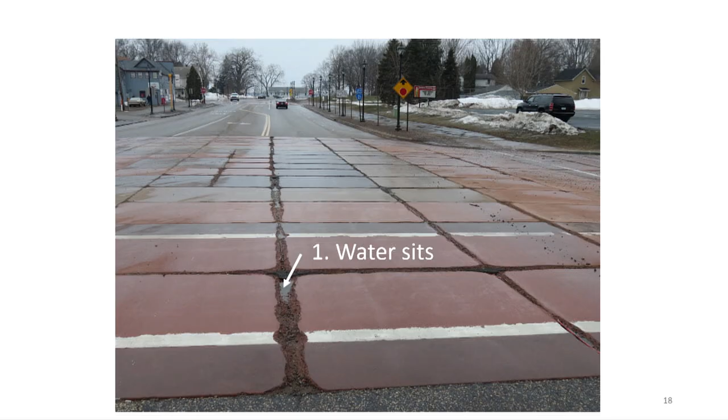So why is this research important? What is this all about? What's going on here? Well, if I have concrete, and if that concrete gets wet, if water sits there and the concrete becomes saturated, really wet, and then it subsequently freezes, it can become damaged. It's damaged by the freezing event itself. That's not good. Well, water, when it goes from a liquid to a solid, there's a 9% volume change.

So I did an experiment for you. Last night, actually yesterday evening, in my fridge, I took a can of Coca-Cola and put that in a freezer. It was sealed, just to see what would happen. Don't tell my wife because I haven't cleaned it up yet. This is what happens: 9% volume change causes an explosion, goes all over, makes a great picture. It's going to be a great YouTube video - but not necessarily making your wife happy.

And it's not necessarily good for your concrete either. Because if this happens in your concrete, it can become damaged, it can cause things to have a problem. If that makes sense, give me a yes on 3. 1, 2, 3. Oh good, you're awake.

So how in the world do you design for freeze-thaw events? How does this work? Well, first the question you ask is, will the concrete freeze? If the answer is yes, then you put something called an air entraining admixture in the concrete - this is like a soap that stabilizes bubbles inside the concrete. You have to get enough air, 6% plus or minus 1% air volume. And if the answer is no, you add no extra air at all.

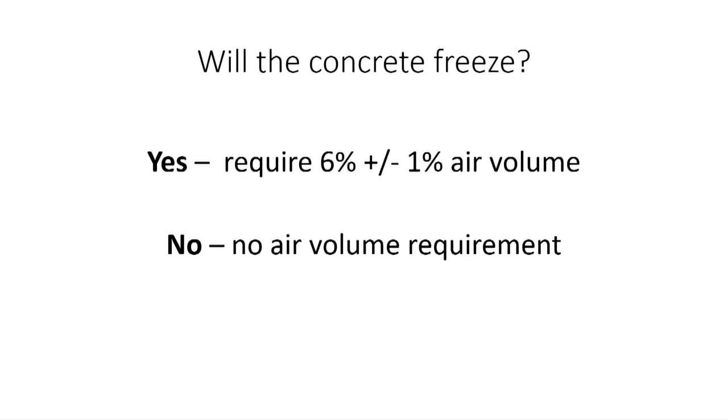You might ask, does this make sense to you? Some of you might say yes, and I would say this is nonsensical - the stupidest thing I've ever seen. Well, weather is not the same everywhere. Does everyone agree with that? Freezing is a little bit different in different places. Moisture content's a little bit different in different places. Don't you think that could have an impact on this phenomenon? I think it could.

If you're still not with me - how would you design a road for traffic? If I did the same thing I did for air entraining concrete, the first question I'd ask is, will there be cars? If the answer was yes, I build I-35. If the answer is no, I build a hike and bike trail. Does everyone see how this is illogical? Give me a yes on 3. 1, 2, 3. Oh, they're not - the left-hand side gets it, the right-hand side is not so sure. There must not be traffic engineers over there. Does everyone see that it's kind of silly to design a one-thing-fits-all category?

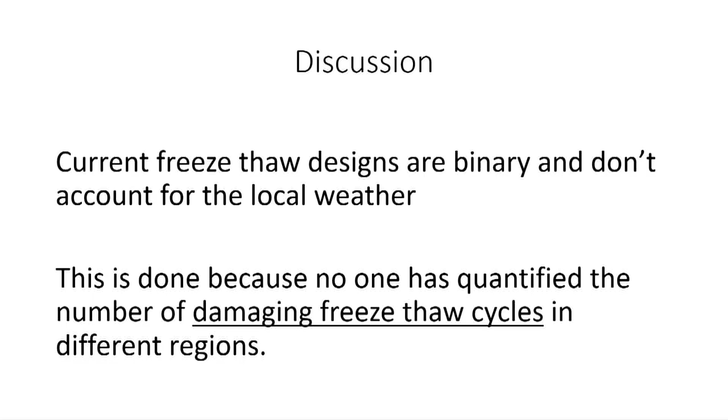This binary decision - freezes, yes, add air, same amount no matter what, doesn't matter where it is - it's illogical, doesn't make any sense. But we do this because we don't know how many damaging freeze-thaw cycles there are. No one's ever quantified it, no one's ever done it.

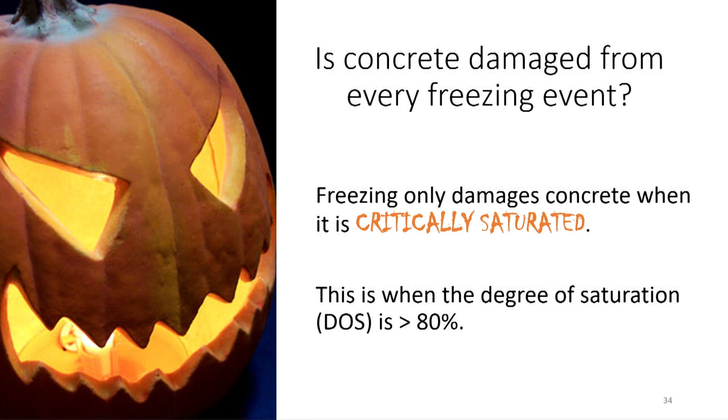So you're like, damaging freeze-thaw cycles, what's that? Well, Halloween's coming - kind of a scary time, right? And what matters is that freezing only damages concrete when it's critically saturated. That means when the degree of saturation is above 80% inside the concrete. Degree of saturation is the percentage of water that fills the pores. So if I'm at 100%, I'm totally saturated. If I'm at 0, I have no water inside it. High DOS means wet concrete, low DOS means dry concrete. You with me? Oh good, you gave me a yes.

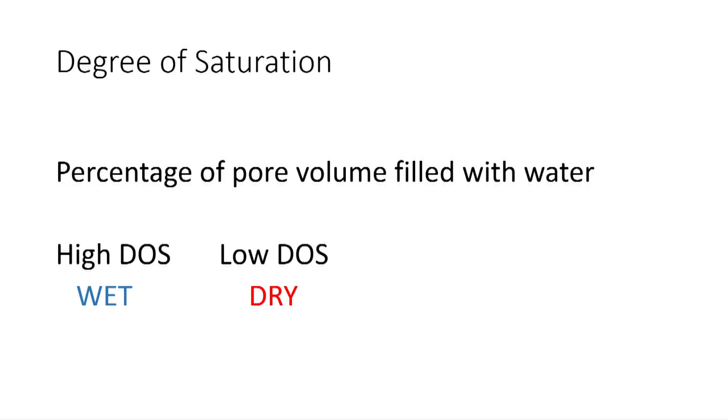I didn't even ask for it. I appreciate that. So what does this mean?

This means if my degree of saturation, if my moisture content of my concrete is below 80%, the concrete will still freeze, but it doesn't cause any damage. Think about the Coca-Cola I showed you before. If the Coca-Cola can is only half full when it freezes, that's not going to explode all over your fridge. But when it gets very, very close to the top, that 9% volume change causes all the damage. Same thing happens in our concrete.

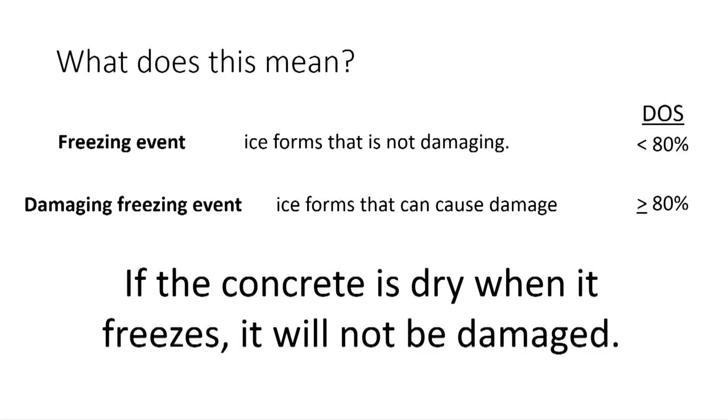Exact same thing. We just have to understand where these places are and when a freezing event happens. You're like, man, that sounds impossible. Yeah, it's hard. It's actually one of the hardest projects I've ever done in my entire life. But I'll tell you how we did it. In summary, if the concrete's dry when it freezes, it's not going to be damaged. But if it's wet, that's when it does.

So how many of these happen every year? Or this year compared to next year, compared to last year? Sounds impossible. We need to know inside of the concrete what the moisture content is, the degree of saturation. We need to know the temperature in the concrete. And we need to know and see ice forming inside the concrete. Oh my gosh, what's going on? How would we ever do this?

It stays there. Why? Because it's the worst case scenario. You know those places exist on your roads. You know those places exist on your bridge. Those places that don't drain, that's your enemy. And that's what I'm trying to simulate with these tests. So we've got these hooked up to weather boxes where we can measure how these things change over time. And there's actually one here. Baha, the great Baha, wave your hand, is over there showing one of these weather boxes if you want to come see it next door.

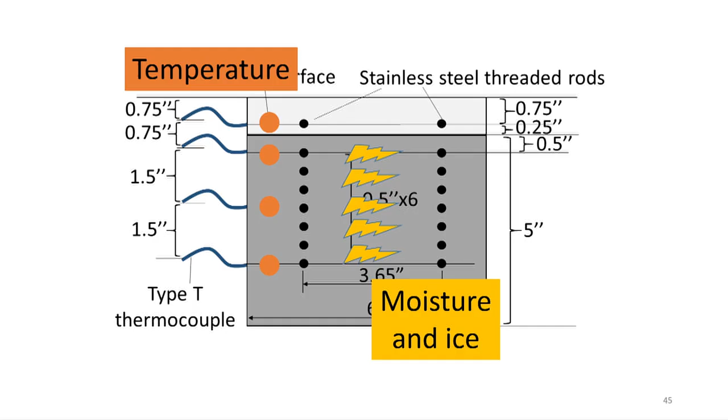Now, between those stainless steel rods, we actually send electrical signals, and we can measure the moisture content of the concrete, and we can see ice forming. You're like, what? How is that possible? Well, when concrete is wet, it's easy to send an electrical signal from one to the other. When concrete is dry, it's hard to send an electrical signal from one to the other. And when ice forms, it's wet, so you're sending signal, and all of a sudden the solid ice particles make it really hard to send signal. So when it gets really easy, then really hard to send signal, ice just formed. And you also have temperature, so you can see ice forming. It's pretty crazy, it's pretty awesome.

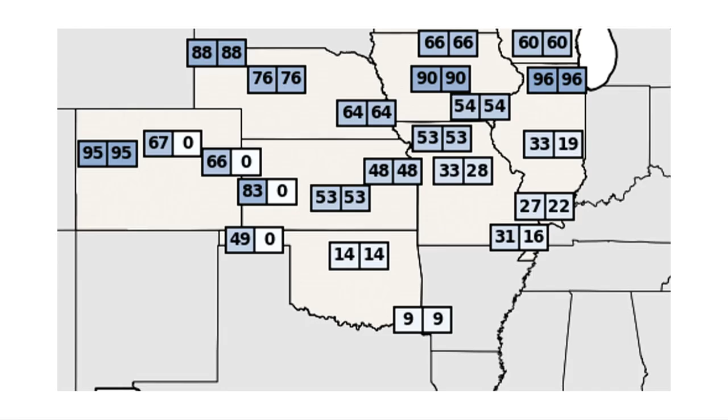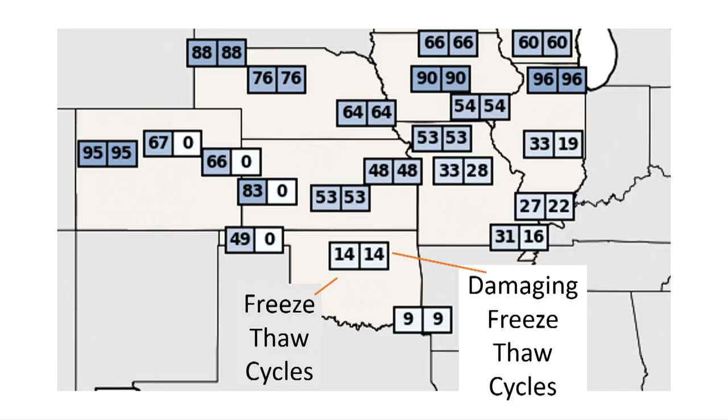So first number, freeze-thaw cycles. That's how many freeze-thaw cycles that we measured in Stillwater, Oklahoma in that year. Second number is how many damaging freeze-thaw cycles we measured. Remember damaging ones? That's when it's got to be wet, it's got to explode like the Coca-Cola inside your fridge. But now let's look next to it. What in the world is happening here? What was the first number?

Number of freeze-thaw cycles, what's the second number? Has anyone ever been to Western Oklahoma? We got some Western Oklahoma people. If you go out there and walk around, it looks just like this.

Tumbleweeds, I've seen more tumbleweeds than ever in Western Oklahoma. It's dry, ladies and gentlemen, it's the high desert. And in the high desert, it's so dry that it freezes, but it's not wet enough to cause damage from freeze-thaw cycles.

And this didn't just happen in Oklahoma. These are 4 separate independent measurements. Does everyone see that? All saying we're getting tons and tons of freeze-thaw cycles, but no ice forming to cause damage. That's crazy. So what's going on over here?

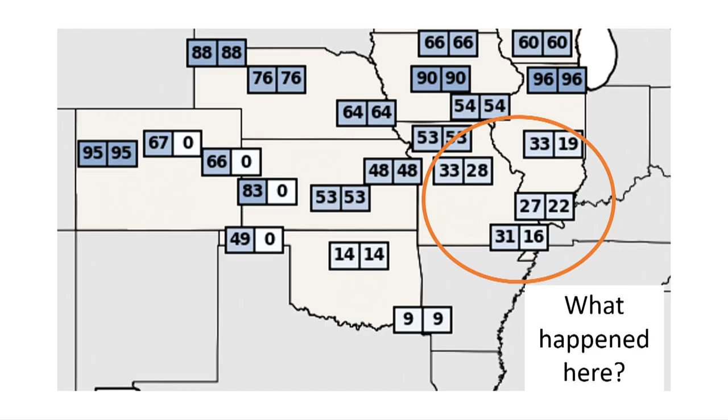Look, what's the first number? Freeze-thaw cycles. Second number, damaging. See how it's a little bit lower? This means these are what I call kind of wet. That's an official term now. Kind of wet, not super saturated, just wet enough sometimes to cause some problems.

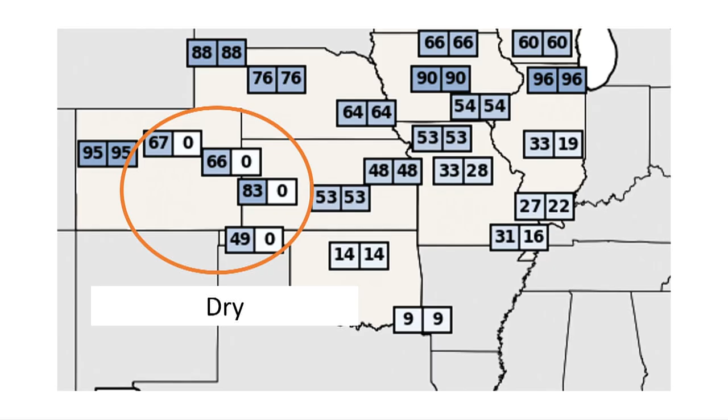So in summary, we have dry, we have wet, and then we have my favorite, kind of wet environments. These all have the same latitude, but because of different longitudes, they have different moisture contents. Does that make sense? So they have different amounts of damaging happening.

This is really mind-blowing stuff that's going on here. When we saw this, we thought, oh my God, this is happening, this is crazy. Then we asked another question.

What weather causes these different DOSs? This is cool to measure it, but what weather is responsible for making these different DOSs happen?

We went into the soil literature, tons of soil literature about moisture contents and models to predict, because farmers really care about the moisture content inside their soils. These are the 6 things that came up again and again in the soil literature for being really important to predict moisture content. So we're going to use those exact same things, and we wanted to use those to predict DOS, all of these things.

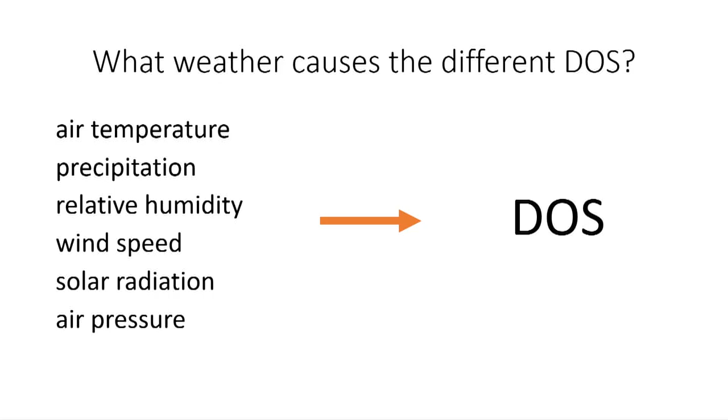So let me get this straight. I got tons and tons of weather data from many years, and I'm going to use all of this crazy data to predict one thing: what the moisture content is. What tool should I use to do that? Oh, baby, AI. This is perfect for AI. This is what AI is made to do.

So that's what we did. We used machine learning models to do this, we used genetic algorithms to do this. We used our average monthly weather data to predict our average monthly DOS. Basically, if I know the weather, I'm probably going to be able to predict how wet the concrete's going to be. Does that make sense? And the weather did that.

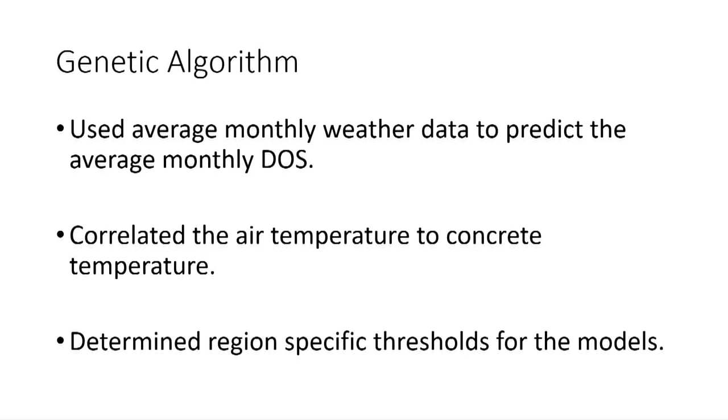We correlated the air temperature to concrete temperature. We determined region-specific thresholds for our different models. What does that mean? That means the weather's different in different parts of the United States, probably not too surprising to you. But there's a little bit different tweak to the model you have to make for each one of these different regions. Different amounts made bigger differences.

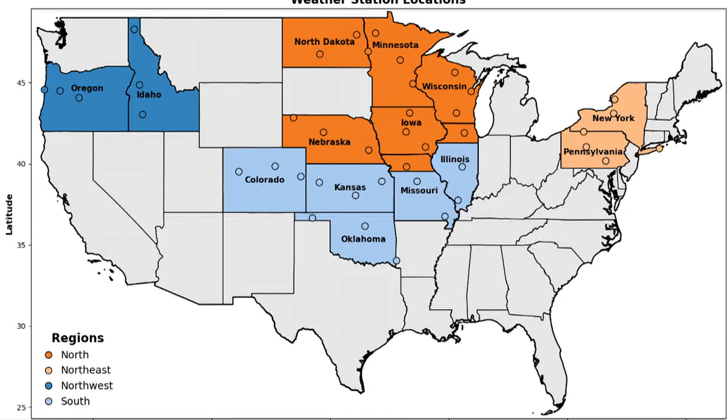So this genetic algorithm, we trained the algorithm for 1 year of data, then we compared it to 3 years of measurements. We had 4 total: 1 year of training, 3 years of actual stuff that we compared it to. We accurately predicted our DOS more than 90% of the time. That's insane. I think that's insane. We could accurately predict our freeze-thaw cycles with more than 95% accuracy.

That's craziness, isn't it good? She thinks it's good, do you think it's good? I think it's good, right? So what does this mean? This means that you can accurately predict the number of damaging freeze-thaw cycles by only using weather.

That means I don't need the blocks anymore. The blocks were cool, they're amazing. But I only need the weather to be able to predict all this performance. That's super powerful. So, okay, you say this is powerful. How can we use this? What can we do with this?

Well, we took 574 weather locations, over 24 years worth of data for each one.

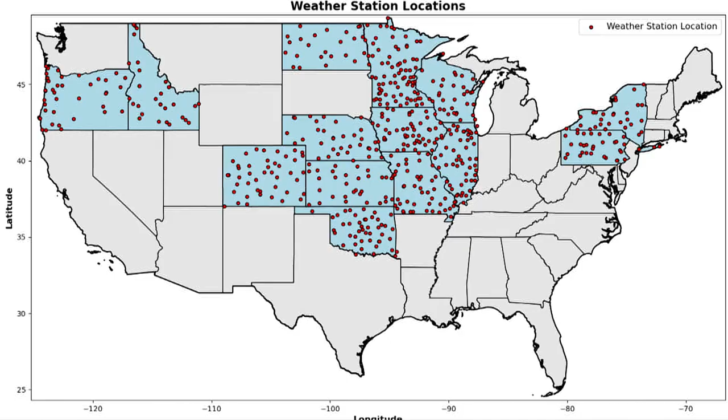We combined the data and made interpolation algorithms to look at values between stations to get the best values. We made maps that look like this. Usually you see this for 'what's the temperature going to be today,' but we can tell you how many damaging freeze-thaw cycles there's going to be on average based on 4 years worth of data. This is powerful.

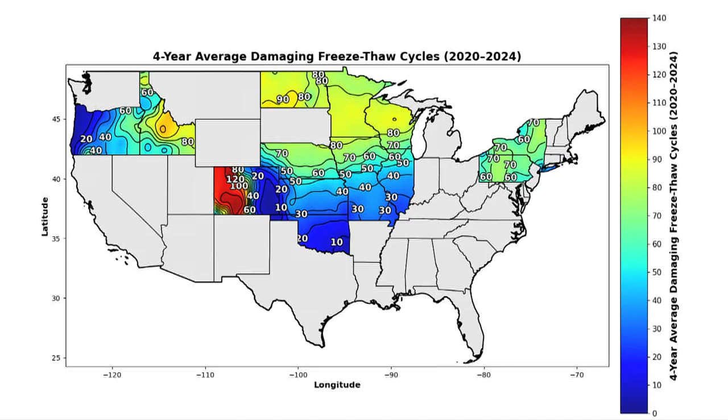You can look in different regions and start to make decisions about where you want to entrain air and where you don't want to entrain air. This is like getting the key information we've been needing from our understanding of what's been going on.

Put in the latitude and longitude, hit a button. It tells you how many damaging freeze-thaw cycles, how many normal freeze-thaw cycles, and what the variability is. It helps you design, helps you think about these things.

So what's next? The next step is to give guidance, to actually tell people: this is how much air you need in this location, this is how much air you need in this location. We're working on that now.

We want to extend this to the missing states. I don't really feel comfortable giving advice about freeze-thaw cycles in a state if I haven't taken measurements there. Does that make sense? You really need to measure in places like Arkansas so you can give them guidance. And maybe we could extend this to other types of concrete, different water-to-cement ratios, vertical concrete, and other things as well.

This is a start, not an end, but it's something we've never had before. It's been my dream for more than a decade to get work on something like this. And this was the hardest project I think I've ever worked on in my entire life, to bring all this stuff together.

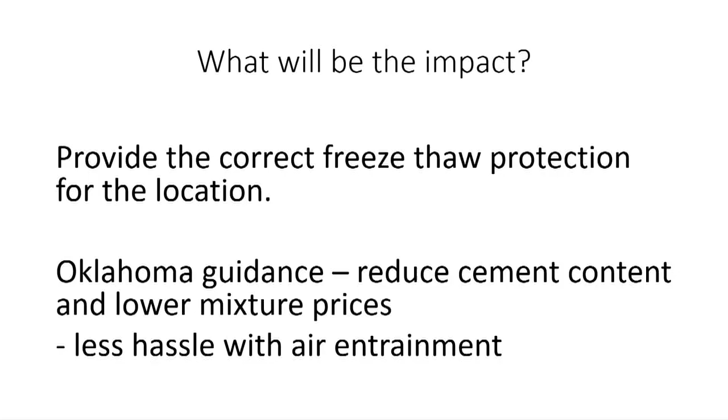It's crazy. So in conclusion, field measurements have been made to determine the amount of damaging freeze-thaw cycles. We did it in 42 different locations over 4 years. A genetic algorithm has been used to predict freeze-thaw performance based on weather data to tie them together. We have maps and online tools that make it easy to show the average and variation of damaging freeze-thaw cycles, and we're moving ahead with that.

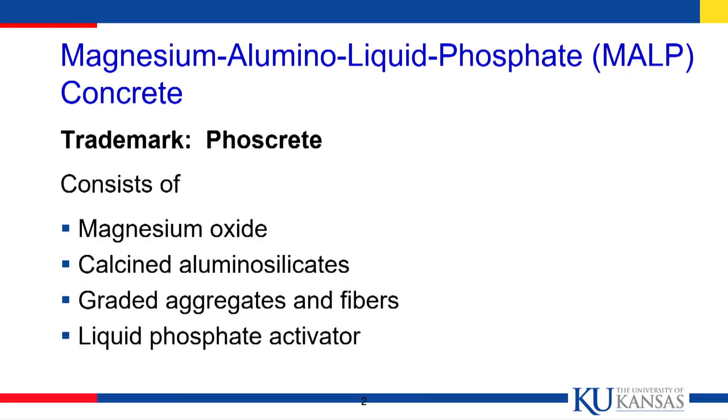So it's really statewide. We've only used it on about 12 or 13 different bridges that I'm aware of. What I'm looking to do is, we built a lot of bridges in the 60s and 70s, and I'm looking for a way to stop corrosion, to get a deterioration rate that's 0, which is a rather aggressive goal, but that's kind of what I'm aimed at. So this consists of magnesium oxide, calcined aluminosilicates, graded aggregate and fibers, and a liquid phosphate activator.

Okay, Dr. Darwin started his testing about 3 years ago, almost exactly, and he's been looking at this material for some time now. He's done some really good testing, and we've learned an awful lot.

We're looking at freeze-thaw damage, like Dr. Ley just talked about a great deal. We don't want materials that are going to have a lot of problem with that. And salt scaling, he's looked into that pretty hard. He's also looked at the MALP material with an additive, and the additive we're dealing with is from a soybean product. It's kind of a pore blocker, and it's called Endure.

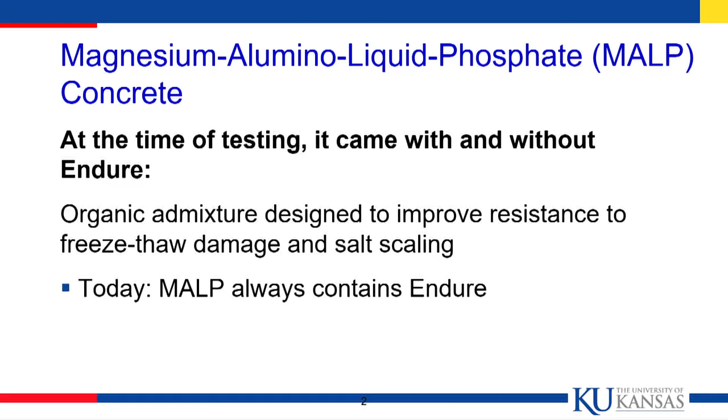So he's doing the testing with and without Endure, and he's going to look at more than one magnesium cement. But what are the benefits of this MALP material? It provides for rapid repair, gains high strength in an hour, and minimizes the time of a bridge closure. That MALP material can be applied in very, very cold weather. It has this liquid activator, which is unique.

Drawbacks: it generates a lot of heat, and it sets up rapidly. Well, that's an understatement - it sets up too quickly. We've had some locations where it's frozen on us before we could actually get the material on there.

So there are some alternatives. We're looking at another kind of magnesium cement - we'll just call it MKP for short, magnesium potassium phosphate. This is water activated, so we've got to avoid the cooler weather. It doesn't have the corrosion properties that the MALP material has, but it is easier to work with. There's less heat that you're dealing with, so it's easier to finish, which is a good thing in many respects.

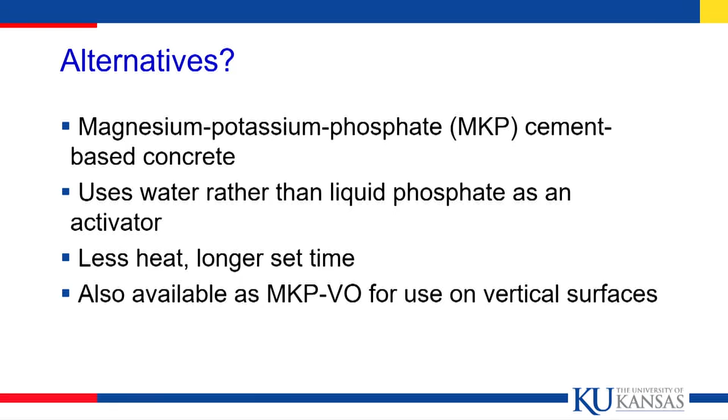For vertical and overhead surfaces, they put a little designation, VO, for vertical and overhead. When they do that, they add a little bit of the MALP material, which you're going to find really improves the corrosion aspects. So this MKP consists of magnesium oxide, potassium phosphate, calcined aluminosilicates, graded aggregates, and fibers, and it uses water as an activator.

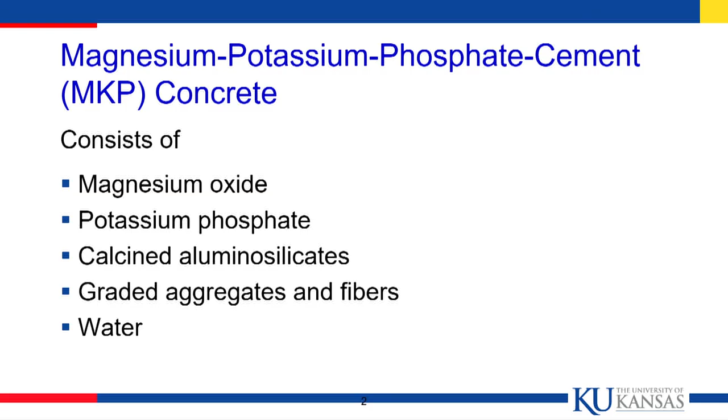Okay, MKP-VO is really MKP plus that Endure product. So it has the soybean product that tends to block pores, and has a tiny bit of MALP in it.

Objective of the study: evaluate the MALP material with and without Endure, study shrinkage, which is a problem for MALP, resistance to freeze-thaw and scaling, and degree of protection against corrosion of reinforcing steel. Dr. Darwin does a crack beam test where the artificial crack goes straight to the rebar.

So, research. I think it's my turn. Yes, sir. All right, so here's what we did.

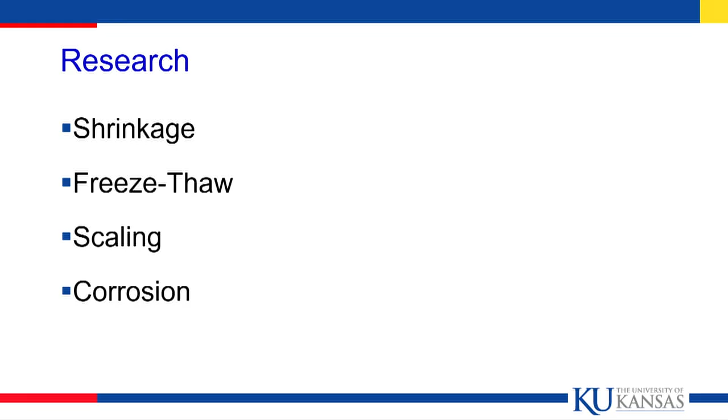We did tests for shrinkage, freeze-thaw, scaling, and corrosion. The shrinkage test is the regular ASTM test for shrinkage, but instead of waiting 28 days to measure the length of the specimen, we measure it right away because you get a lot of volume change and it sets up really, really fast. So we start measuring right away.

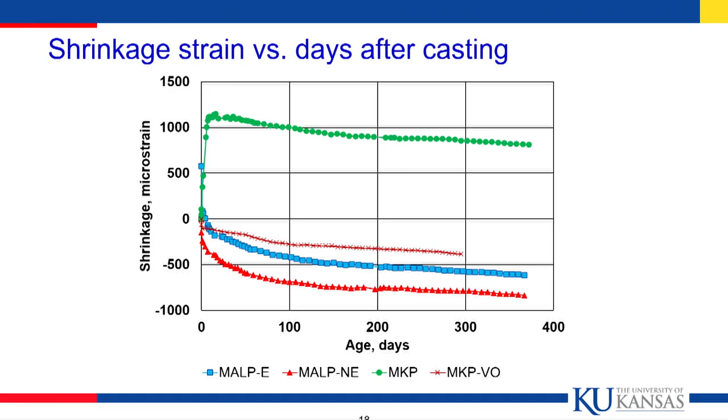Well, expanding is good, because if you put it in a repair, you don't want a crack to form adjacent to the repair region. The other three materials all shrink, and that means the potential for opening up a crack at the edge of a repair. Okay, we also check freeze-thaw.

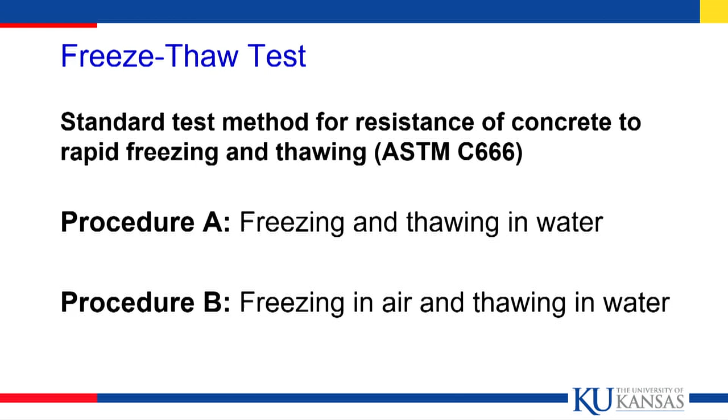When we do freeze-thaw, we use the standard ASTM method, C666. It's got two different methods: one you freeze and thaw in water, and the other you freeze in air and thaw in water. We ran both of these. We have limited time to show you what we got, so we'll talk about freezing and thawing in water, which is the worst condition. What you do is you freeze and thaw after so many cycles.

You measure the natural frequency of the concrete. The natural frequency helps you determine what the modulus of elasticity is, and the higher the natural frequency, the higher the modulus of elasticity, and the less the damage. If you've got damage, you'll see the frequency drop. That then converts to a decrease in how stiff the concrete is, and you get a feeling for what kind of damage there is.

So here we started off with three kinds of specimens: one with solid material all the way through, one with conventional concrete at one end and the phoscrete, which is the trade name of this material, on the other, with a vertical interface, and we also tried it with a horizontal interface.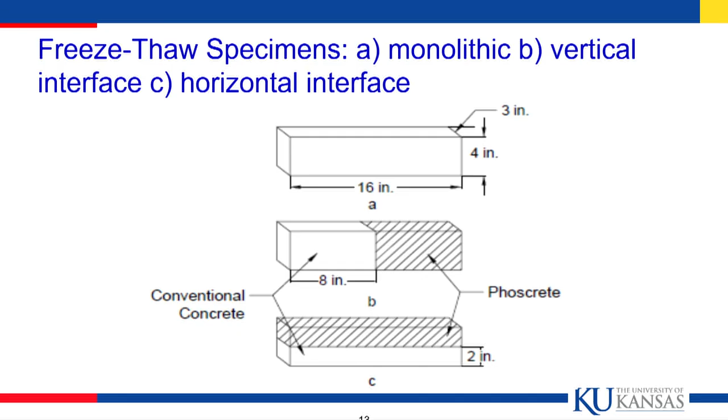I'm going to show you no results for the one in the middle because it fell apart right away. But we did get good results for the solid material and the solid material in conjunction with conventional concrete.

These are the results. Vertical axis is the percentage of the initial modulus of elasticity, and the horizontal axis is how many freeze-thaw cycles. Now, if the modulus of elasticity goes up, that's good. If it drops, that's not good.

What we see across the top are the two different versions of the MALP, the first thing we started evaluating. Remember, MALP shrinks, so that's not so good, but this is freeze-thaw. What we see here is the two different versions of MALP go up. That means they're absorbing some water, actually, even though they're quite dense. And this stays constant. So the key point is that these lines are almost horizontal, meaning no damage from freeze-thaw.

Now at the bottom, you see those green circles going down. That's the really good low shrinkage material, actually the one that expands, but it does not do well under freeze-thaw cycles. And so that's not good.

And in the middle we have the two cases: the MKP-VO that has a little bit of MALP in it and some Endure, and then we have the combination of the MALP and conventional concrete. Notice that pink line in the middle at 90%, that's the failure level. If you can get past about 650 cycles, that's a pretty good material, even though it does drop. So we know we can combine those materials with conventional concrete and do okay. And the MKP-VO looks pretty good.

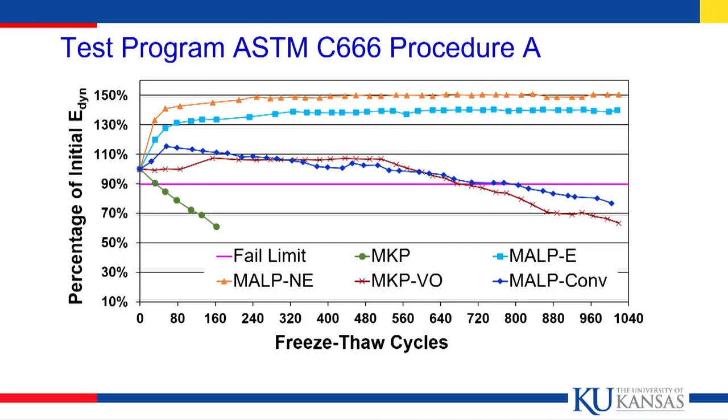All right, we also check scaling. Now, we don't use ASTM because ASTM has thrown out their scaling tests, and there's some good reasons for that, which we could talk about later. But we use the Quebec test, which has been determined to give you a better match with what happens in the field.

You pre-saturate the material, then put it through cycles of freezing and thawing, not a lot of them, and measure how much material is lost in terms of pounds per square foot. Here are the results from the test. The vertical axis is mass loss in pounds per square foot, and the horizontal axis is the number of cycles.

You only have to go through 56 cycles on this. What this tells us is everything's flipping back and forth. The two upper lines are the two versions of MALP. The ones that did so well in freeze-thaw do really bad on the scaling.

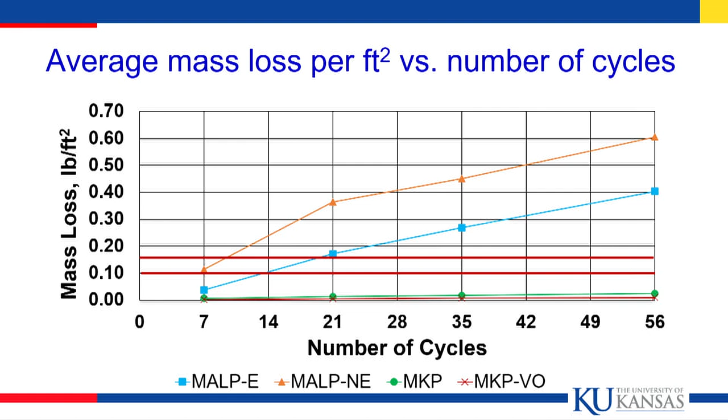The ones that are horizontal down near the low end, especially MKP, did very poorly in the freeze-thaw but really well in scaling. If those two horizontal lines are the failure levels for the province of Quebec and the province of Ontario, it doesn't matter what they are. We see that the materials we'd like to use in terms of freeze-thaw are not doing well in terms of scaling. Okay, how about corrosion?

We run corrosion tests both indoors and outdoors. These are our corrosion test specimens: one without a crack above the top reinforcing steel, one with a simulated crack 12 mils wide above the top rebar. We pond 15% salt solution on the top, cycle through wetting and drying, pump the salt down to the level of the steel, and measure the corrosion loss that occurs between the top and bottom bars.

And what do we get? The vertical axis is the corrosion rate in micrometers per year, and the horizontal axis is the time in weeks for our cycling of wetting and drying. So you see numbers like 15 or 20 micrometers per year. What does that mean? If you have 25 micrometers of loss, you'll crack the concrete. If you got a bridge deck with 25 micrometers, that's obviously not good.

These are the crack specimens, which is not too dissimilar from bridge decks. We can see coming across the top is the MKP. It's not doing very well at all, even though it had low shrinkage. The blue line is actually conventional concrete, we threw that in there to see how it did. So the MKP and conventional concrete look about the same.

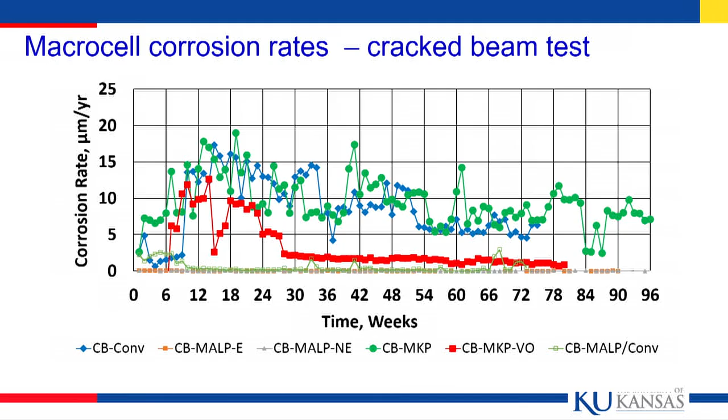The red squares going through there, that's interesting - that's the MKPVO. It starts off very low, then jumps up looking as bad as the other two, and then comes back down and does pretty well for the rest of the test, which means there's some potential there. Then we have all the stuff running along at the very bottom with essentially zero corrosion - those are the two different versions of MALP, and also MALP combined in the top with conventional concrete below. So we're getting another picture.

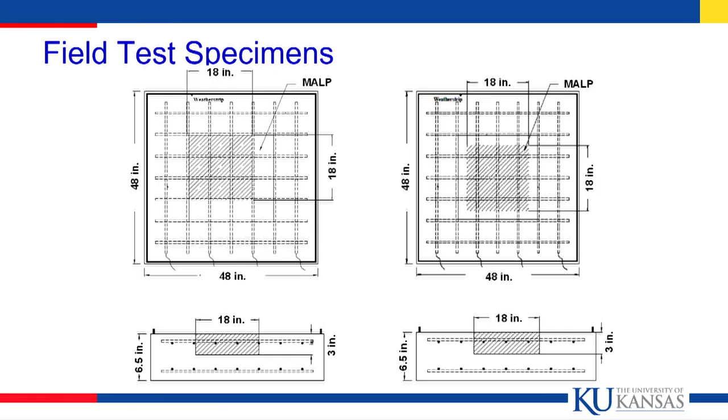Okay, how about out in the field? For the field tests, we cast 4x4 sections that represent bridge decks. The only difference between this and a bridge deck is that we only have 1 inch of cover on top of the top reinforcement instead of 2.5 or 3 inches. You can see the shaded in areas - we have different kinds of repairs that we put in there, and the repair in this case would be the MALP material. So how did it do?

So to summarize in terms of shrinkage: we have three materials, the two versions of MALP and the MKPVO. They shrink, with MKPVO shrinking somewhat less than the two versions of MALP. MKP by itself expands and then shrinks, but the shrinkage rate is slower than for the MALP. So it looks pretty good as far as shrinkage.

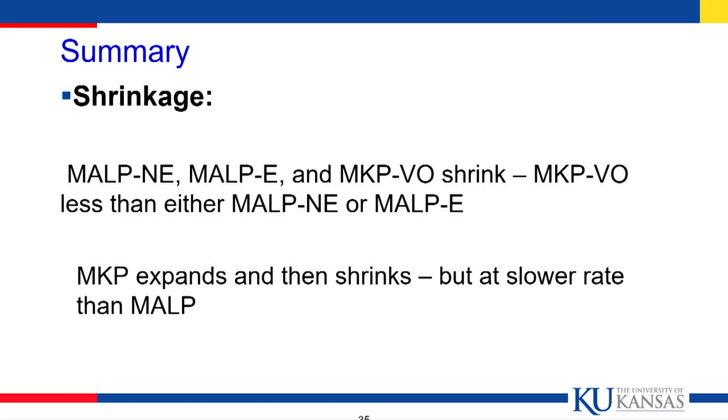But in freeze-thaw, MKP does not do so well. Whereas MALP does well, MKPVO is kind of in the middle.

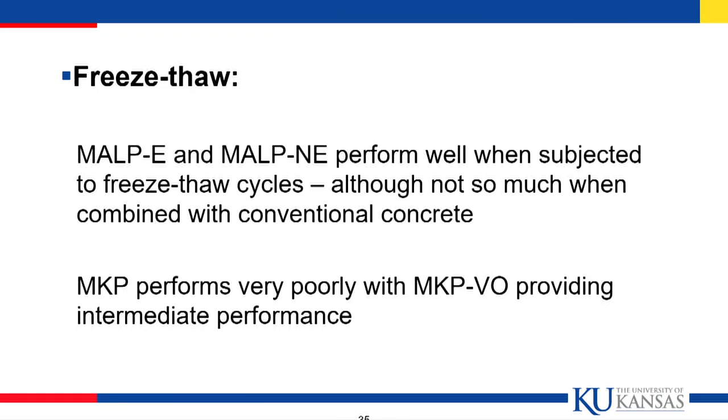And then we have scaling. In this case, our great freeze-thaw materials do very poorly in scaling, where both versions of our MALP material do poorly, and MKP does extremely well.

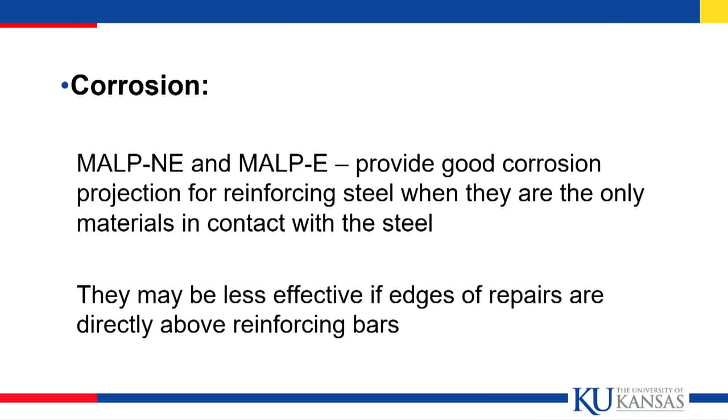And then in terms of corrosion, we flip back again. MALP does well in that, but clearly if a rebar is totally surrounded by MALP, great. If it gives a path for salt to get down to the bar, then not so good. And then MKP and MKPVO are there less effective.

Let's thank Dr. Darwin for his presentation. We have time for maybe a question, if anybody has one.

All right, Shreya, let me come to you. Thank you for the great presentation. In the graph for corrosion rate in microns per year...

No, I think what protects the material with MALP, and also with this MKPVO, is the fact that the material is so dense that it limits the amount of oxygen, moisture, and salt that can get down there. Even with a crack, you need oxygen and moisture at the lower bars to act as a cathode, and if you don't have any oxygen and moisture, you get no macro cell corrosion. So that's the main reason.

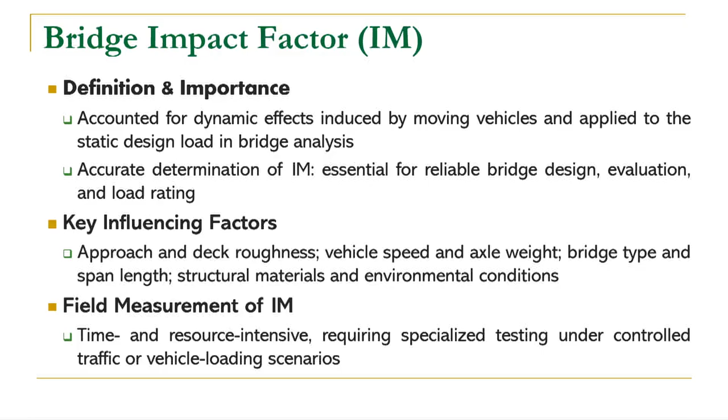He's doing this at 60 miles per hour, with this vehicle equipped with lasers, collecting data. He did a big section of I-35, and he's also done some on I-40. So, this is a tremendous effort.

So we want to create a method of getting our impact factors that's cost effective, build practical data-driven models, develop faster accurate methods, and maintain accuracy by correlating.

You have these rough approach slabs that are really the bump at the end of the bridge. It's not just hard on your car and its shock absorbers, it's hard on our bridges. So if Dr. Lee finds some of these approach slabs that are not too smooth, that's a good candidate for us to do some maintenance on.

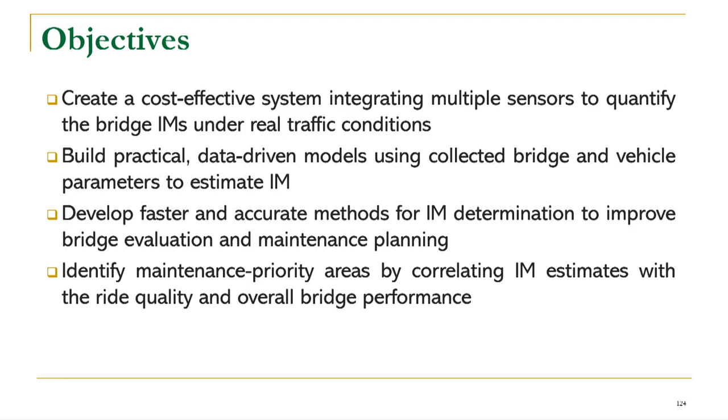Any research project you do is going to have a literature review, and this is pretty important because you kind of see what's been done by other professors, and you get an idea of what you need for sensors, for what really causes the impact, and it can be a lot of different things.

It's the weight of the truck and the speed the vehicle's going, alternative data approaches, different techniques that you can use. Processing the information can be kind of a challenge because we look at 13 bridges and we get all kinds of data on all kinds of different types of bridges, which includes concrete, steel, pre-stressed, simple, continuous.

We even had one bridge that was a rigid frame, which kind of surprised me. The pier cap was kind of built into the superstructure, so when you drive over the bridge, you actually get a little stress in the column.

Approach conditions, he went to the extremes. I think in terms of good, fair, poor, he wants to do the really good bridge decks and he wants to do the really poor bridge decks. So that gives him better data to evaluate how the bridges are performing.

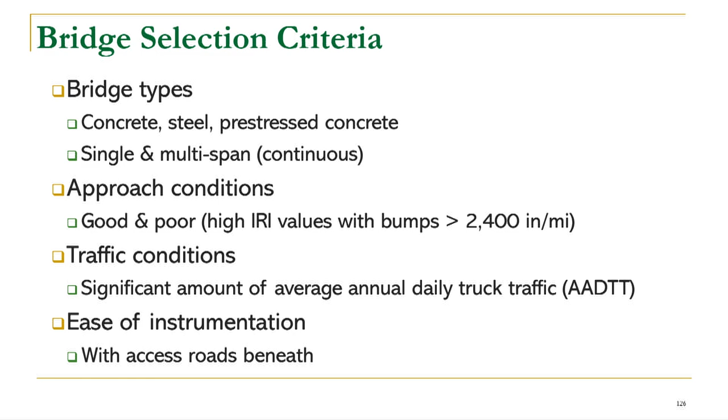Ease of instrumentation - Dr. Lee did a tremendous job of finding a way to do weigh-in-motion, up front of the bridge and then on the bridge deck, to get the static and the dynamic influences.

Now we're going to look at the different bridge locations. We had some on I-35, north and south, and we had some south of Clinton on 183, and we had different types. There was some that was continuous for live load and others that had different construction. Thank you all.

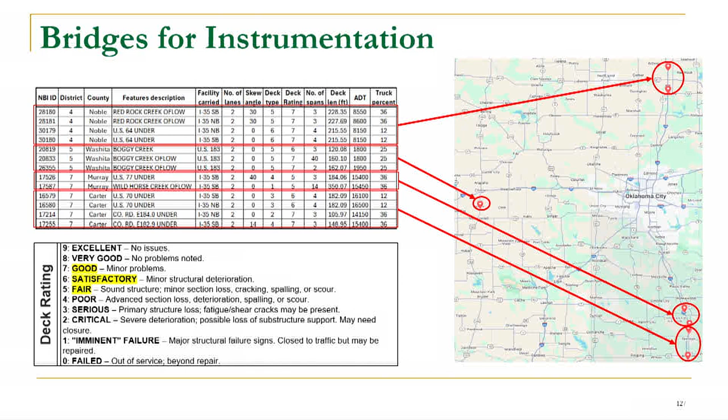So after we select the bridges, a few instruments have been used for the field data collection. So we drew like some kind of cartoon right here.

So we have weigh-in-motion. On the surface, we have vehicles to test the distresses and also the profiles of the roadway and also the bridge deck. At the same time, we have the cameras because we have all types of traffic on the road.

So you may have multiple vehicles on the road. So we are able to use the camera so that we know whether there's only one vehicle or there's multiple vehicles, because some of the impacts will be combined.

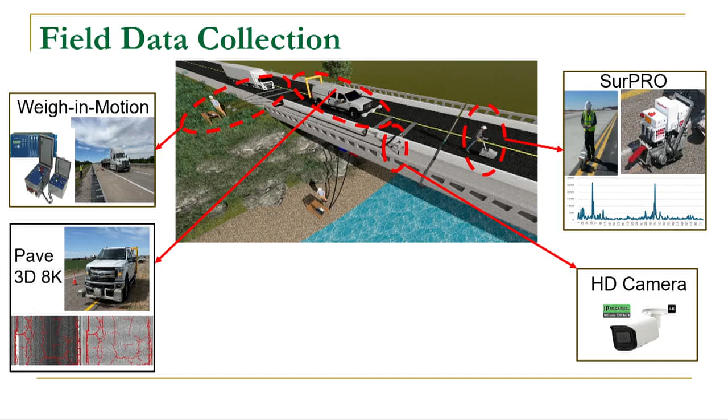We also use SurPro, the small instrument in the next room - we have the small instrument right here. This is a ground truth profiling device. Under the bridge, we have the strain gauge and also the IMU.

So we have two sets of weigh-in-motion sensors. The original idea is we place one weigh-in-motion on the roadway to simulate the static load, and another one on the bridge deck, at the first middle span, to simulate the dynamic load. At the same time, our strain gauge and accelerometer IMU was right below the middle span.

The cameras are trying to track the truck event - when is the truck, in which lane, and also what type of truck, and so on. So we are able to, based on the video data, exclude the data with multiple vehicles on the deck. We want to have a clean signal, with one truck on the deck.

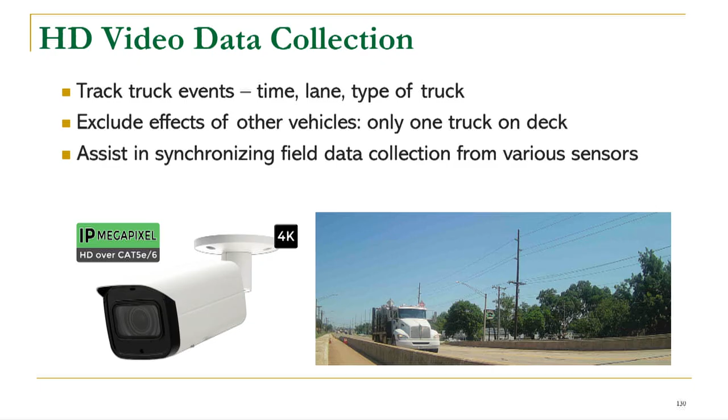And SurPro, we use this to get the profiles based on the literature review. So the profiles are one of the most important parameters that impact the dynamic factor. So we want to have very accurate profiles.

As we know, a lot of the times for the roadway, we use the accelerometer-based profiler. As we know, a vehicle has the suspension. When you have the accelerometer in the vehicle, if the road is bumpy, there are two types of responses - one is from the vehicle, the other one is from the road itself.

So this one is based on an inclinometer. There are two wheels. We know the distance of the two wheels, and using the inclinometer, you measure the angle. Therefore, you are able to know the height difference, the change. So this one essentially is a true profile.

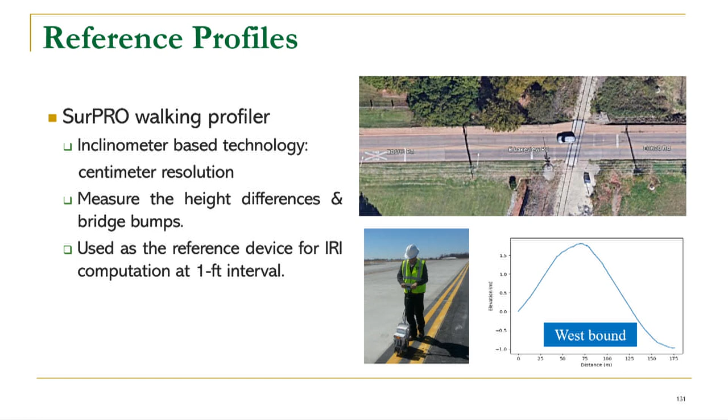And the bridge instrumentation, we have the strain gauges and also the IMU. So if it's a single span, it's at the bottom flange of the girder or near the middle span. For multiple span, we only work on the first span.

We also use the vehicle in the front. You can see this is the AIMS profiler, the longitudinal profiler. And also in the back of the vehicle, that was to acquire the surface distress condition.

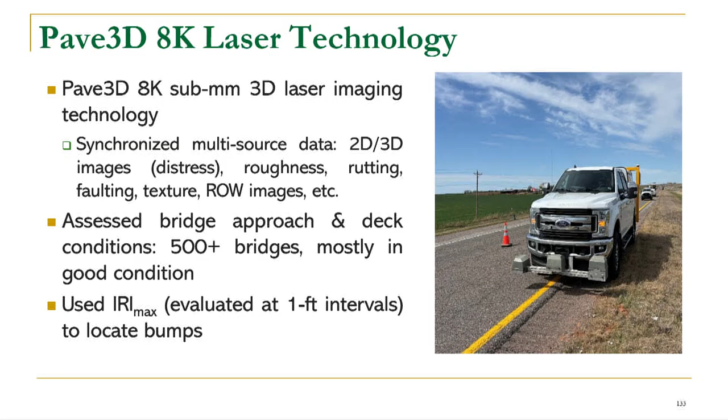Here are some of the data we have. For example, we have the 2D and the 3D. We have the cracks, we have all types of distresses. At the same time, the figure below is the IRI, the longitudinal profiles.

So for the roadway design, for the roadway, the PMS, generally we use 25 feet or 50 feet wavelength to get our IRI in order to quantify our roughness. But for the bridge, in order to identify the bumps and also the irregularity on the bridge deck, we use 1 feet, so some of the numbers, IRI, is really big.

In roadway, generally on I-35 we had 120, 130, so that's probably not a very good condition. But for the bridge deck, if you use 1 feet, it can go 1,200, 2,000 inch per mile. So we use that to identify the bumps and also some of the distresses on the road.

So after we have all the field data, we compile 3 different types of data. One is the bridge data. The bridge data is primarily from the NBI and also from ODOT. So we have some of the geometry and what type of bridges and so on.

And the second type is the surface condition, including the roadway and also the bridge deck. There are primarily 2 types of data. One is the distresses, including the cracks and all the different bumps and so on. And based on the profile data, we get the roughness data at 1 feet interval, so we are also able to identify the bumps. These are the surface condition data.

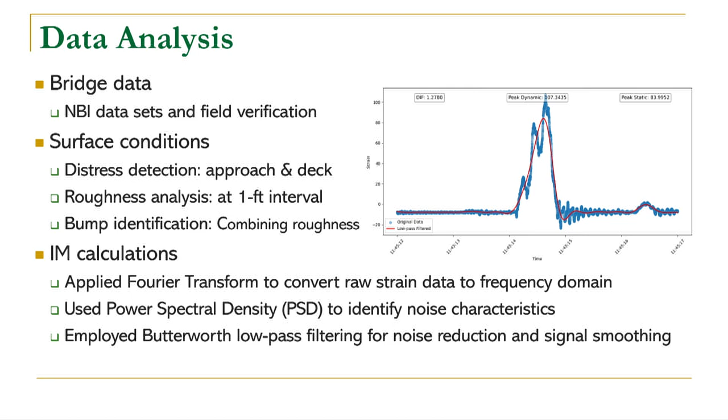So that approach has been used by a few state DOTs. The most closest one is by Iowa DOT.

After we have that, this is the major challenge, because on I-35 we can have thousands of vehicles per hour. So there's a lot of vehicles, and some of them have different types. So therefore, in order to make this kind of data processing feasible, we developed a software.

So this software, you can see the picture right there is a video camera. And then here you have the strain gauge, and this is the IMU. And here you have all different kinds of tools to help us sync the data, because all the sensors are using different computers. The WIM, weigh-in-motion, is before the roadway and on the bridge deck, and the strain gauge is below the bridge, and there's 3 to 4 computers at the same time. So we want to sync that.

So then we have different tools right here, and this one will be the weigh-in-motion. So we use this software to sync the data, and also at the same time use the software to automatically calculate all these different numbers.

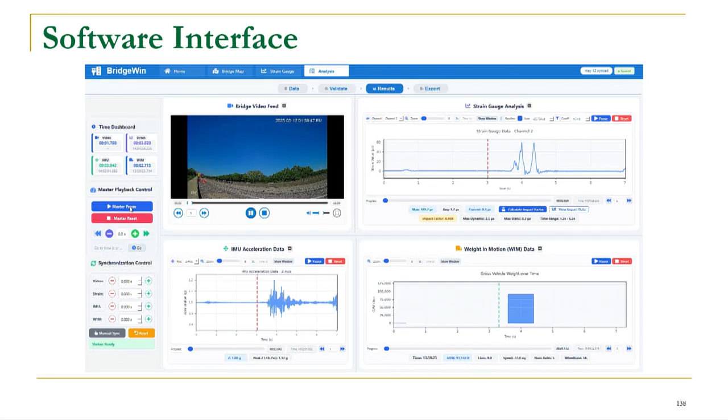Okay, after we have that, Dr. Manina, could you click on the video? So we made a very short 30-second video.

So you can see the trucks passing by, and for each truck you see the strain gauge and IMU and also the weigh-in-motion. Everything has been synced, and the software is able to calculate all the parameters and save into a database. Then we use the data for our model development, because our goal is to develop a procedure to estimate the impact factor.

So for the model, we have two types: one is the regression model, one is using machine learning. The dependent variable will be our impact factor. Our independent variables will be the three types: the bridge, the roadway condition, and the vehicle.

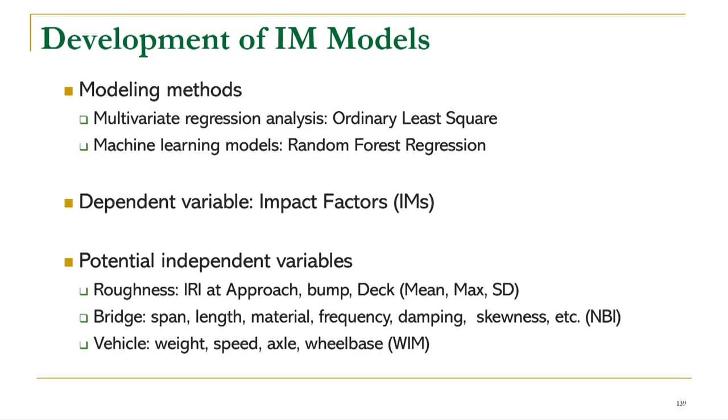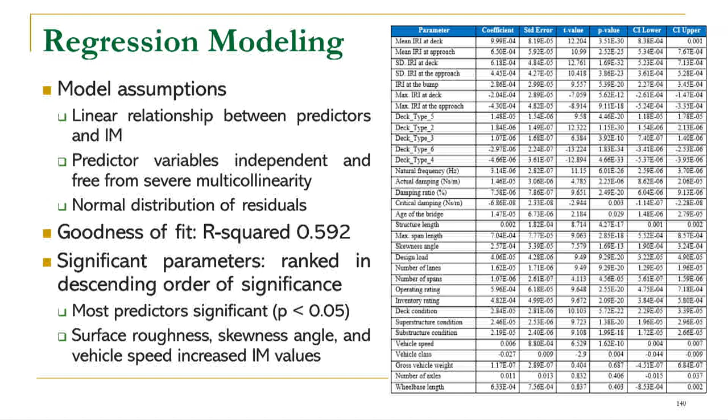Here's a regression model, most of you are very familiar with it. This shows some of the results, which ones are most significant. Generally speaking, the most significant variables are the roughness, the skew angle, and also the vehicle speed, which can increase our impact factor. But as we know, one of the assumptions of regression models is that the relationship between y and x is linear.

And how can we use that? Here are some of the validation results. You can see for the regression model, the variance is much larger, the band is larger, and for the random forest, the results are a little bit better.

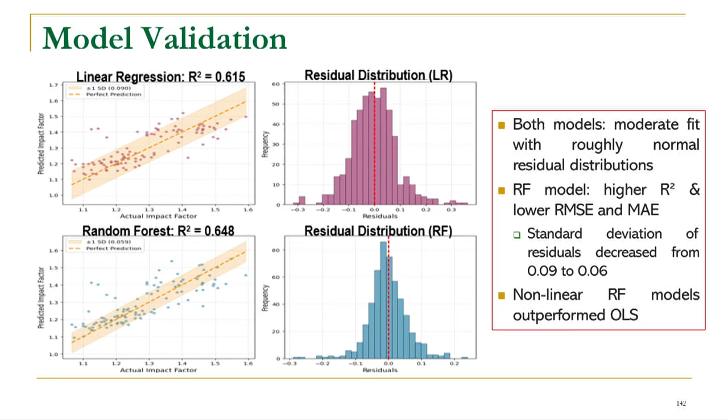Okay, how are we going to use that? Right now our roadway PMS collects data every year on the national highway system. We have the roughness data, but generally for pavement design and pavement PMS, we exclude the bridge data from the PMS. So the data we collected, right now we don't use it. But with this model we developed, we are able to use our roughness data.

We are also able to characterize the vehicle loading conditions. Just like Dr. Lei mentioned, we don't care whether it's 82 kips or 80 kips - we use fully loaded, empty loaded, or partially loaded. We put it into the equation, along with the speed and so on, so we are able to estimate the impact factor. This is a bridge close to Purcell on Interstate 35.

I think what's interesting about that slide was that the heavier gross weight actually had lower impact, which for load rating, I think that's something you want to hear. The higher speeds did cause greater impact, so that's a concern.

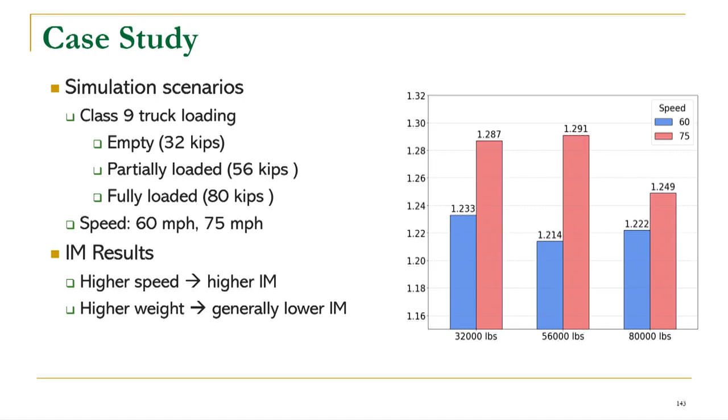All right, summary. Dr. Lee and his team has done a phenomenal job, I think, of developing a rapid method to estimate bridge impact factors, which I think could be used for load rating. I think just in a few years that may be happening - we'll go through the Committee on Bridges and Structures and see if we can make that happen.

We've collected and synchronized some multi-sensor data. We've used smoothing techniques, which was amazing. That machine learning is just really neat stuff. So he developed some very predictive models.

The future work is going to expand the data sets and apply advanced methods for improved model accuracy. So maybe those R-squared values will get - I think 90s is too optimistic, but I think there's going to be some improvement.

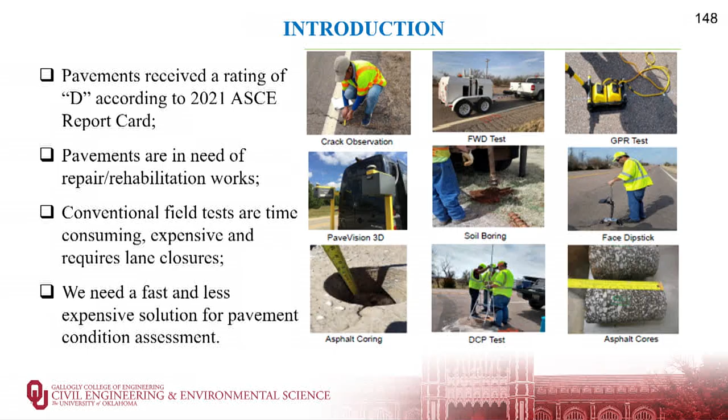The conventional tests we are doing right now are relatively time consuming and expensive, and they require lane closures, putting our staff on the road, so this is not very safe either. So what we need is to expedite the process - something that is fast, less expensive, and can collect lots of data, giving us lots of information in a short amount of time. That's why the topic says it is a rapid assessment - we're trying to do something rapid.

Currently, the way we do the structural evaluation of pavement is using falling weight deflectometer. It has been used for several decades now, and it is a very reliable tool, very highly accurate.

But the problem with falling weight deflectometer is that you have to close the lane, put your crew on the pavement, and you need traffic control. Also, you are limited on the data. You cannot collect continuous data, it is a spot test. You take results maybe every tenth of a mile, and you cannot do it every year. Generally they do it every two years or so, so this is not very frequent data collection. But it is still a very good, reliable tool.

So what we wanted to see is what other things we can explore. Dr. Lee and his team already worked on Pave3D 8K. It is a very good tool, already proven for pavement condition assessment at very high resolution. It can give you transverse and longitudinal profiles, and it has been used for quite some time now. So Dr. Lee, I'm preaching for you here—please send some money to my account, please.

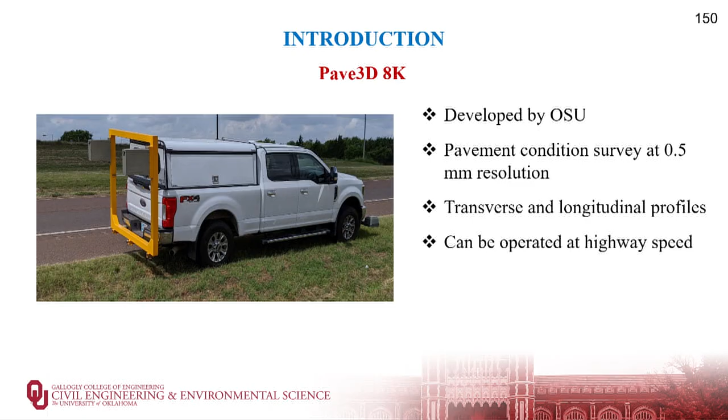We also wanted to see what other methods and tools are available for pavement condition assessment. At TTI, they have developed one tool called air-coupled ground penetrating radar, or GPR. This is a 1 gigahertz air-coupled GPR that can run at traffic speed, so you do not have to close the lane. The good thing about GPR is that it doesn't only look at the top, it can look at what is going on underneath, the subsurface condition as well.

It can run at 60 to 70 miles per hour, so there is no need for traffic control. And it provides pavement structurals, showing you the anomalies underneath the pavement. That's very, very good information to get.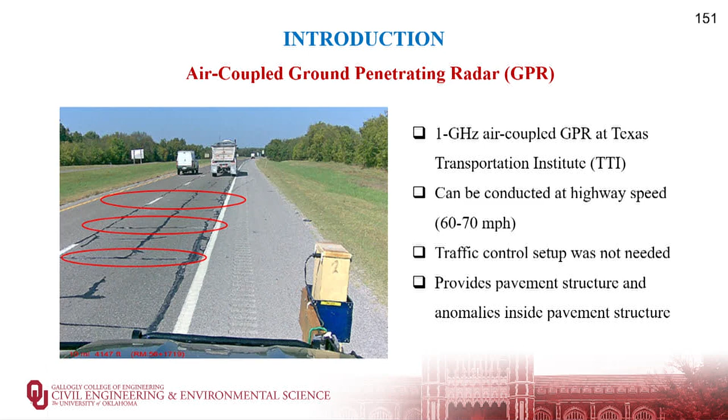So the next tool I'm going to introduce is called the traffic speed deflectometer. Who has not heard about it here? Or who does know about it? Okay, I can see a few hands. This is a relatively new tool—it has been in the market for maybe 4 or 5 years now. We have only one TSD truck in the USA, run by ARRB, and right now they are collecting some basic data.

The traffic speed deflectometer can do work similar to the falling weight deflectometer, but it's continuous. This truck runs at highway speed, you do not need lane closure or any traffic control. It runs and collects data by putting some load on the rear wheel, and at the same time collects deflection data using laser. It can collect the whole I-35 data in one day.

And they did it here. So traffic speed deflectometer is a new thing, coming up very fast, very safe, and gives you a lot of data in a relatively small amount of time. At high measurement speed, dynamic loading is more representative of what traffic loading is actually happening. This is a very good tool for network level assessment—if you want to assess the whole network, this is the kind of tool you need, where you can take lots of data within a short period of time.

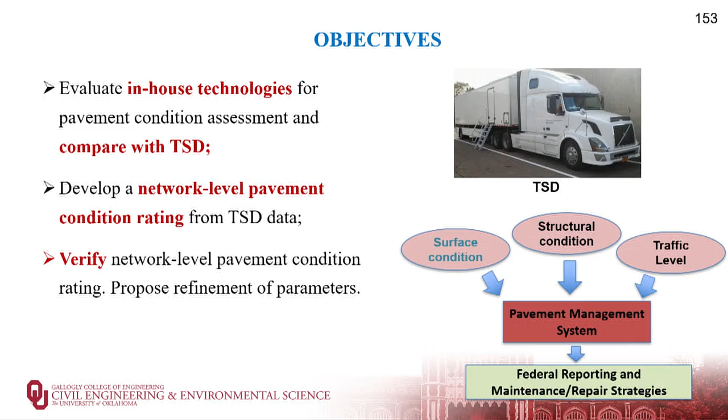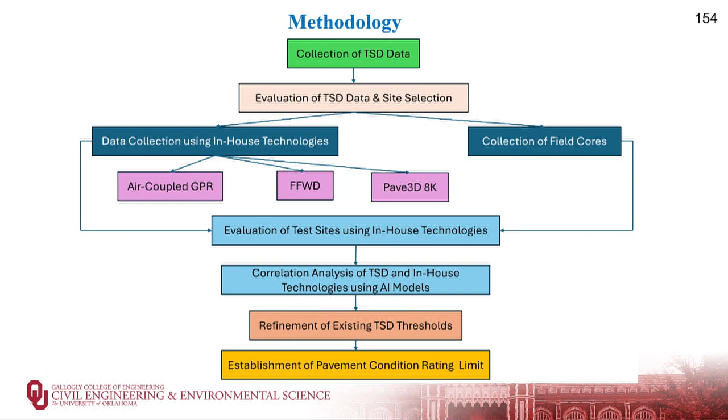We collected TSD data first, and from that TSD data, we defined a few parameters to find out good, fair, and poor. Then from that, we selected some study locations. On those study locations, we collected data on GPR and fast falling weight deflectometer, which is similar to falling weight deflectometer but runs a little faster. We took help from TTI to do that. We also collected data with Pave3D 8K, and analyzed that data to find the correlation between different parameters we can get from all these different technologies. Then at the end, we tried to refine the TSD threshold values.

Then Pave3D 8K was done by Dr. Lee's group in the summer of 2024, and the raw data was processed and analyzed by his team and sent to us for more analysis. Falling weight deflectometer and GPR was done almost at the same time, in the summer of 2024, by the TTI crew. Also during that summer, we collected some core samples to look at the actual pavement condition, selectively coring from distressed and non-distressed locations to see whether what we are getting from TSD and other technology is saying the same thing or not.

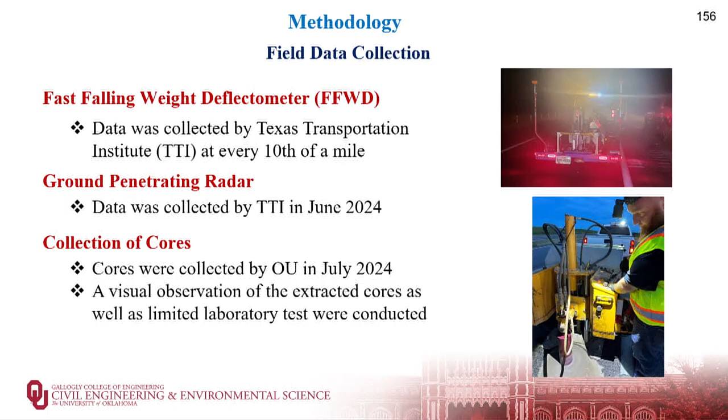All right, so from the TSD data, this is a massive amount of data we received. After getting that data, we had to clean it. There are lots of anomalies in the data, so we had to clean it. We also had to take out the bridges from the data, because we are just looking at the pavement condition, not the bridge condition.

So we had to clean a lot of it, and then we analyzed and developed several parameters. The first parameter is the SCI 300, called the surface curvature index. This is developed from the TSD, which is actually the deflection at 0, meaning underneath the wheel, and also the deflection at 300 millimeters from the wheel. So based on that parameter, we calculated the SCI 300, and this parameter is known to have very good correlation with the surface structural condition.

So we plan to use that. Initially, Oklahoma DOT does not right now have any threshold limits to define pavement as good, fair, or poor. So what we did was look at the literature to find out which state agency or literature has an SCI requirement.

We found that Virginia Tech Transportation Institute proposed a requirement for SCI 300, and we used that requirement: less than 68.58 is good condition, between 68.58 and 93.98 is fair, and more than 93.98 is considered poor pavement.

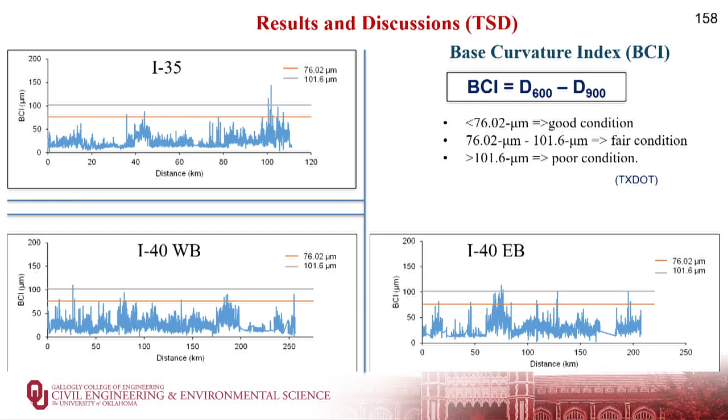We calculated another parameter called BCI, Base Curvature Index, which is more representative of the subgrade or subsurface condition of the pavement. We used threshold values from TxDOT, and we found that almost all the pavement showed very good results—both I-35 and I-40 are in very good condition at those locations.

We also wanted to see if there was another parameter that could help define the threshold. AUPP, area under the pavement profile, is another parameter we wanted to examine. Although there is currently no limit or threshold available for it, we wanted to use it for our analysis.

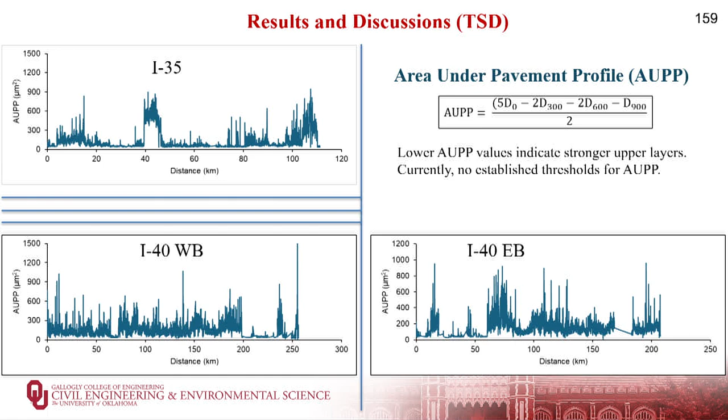Based on all this, we tried to find locations for further study. We selected 3 sections from I-40 and 3 sections from I-35, and classified them as fair, good, and poor. But remember, this classification is based only on the initial data we have—it is not a final classification.

So we collected more data—the Pave3D 8K fast falling weight deflectometer data—and also did some coring on those specific locations. From Pave3D 8K, we can see that section 2 was considered good.

This is a result from I-35—section 2 was considered good. Just look at the rut depth from the Pave3D 8K: very low rut depth. That also shows that whatever we are getting from Pave3D 8K is telling the same thing as the TSD.

Section 1, fair, has a little bit higher rut depth, but not much. The poor section has some spikes, but not that much either. So there's still a very good correlation between the Pave3D 8K and TSD.

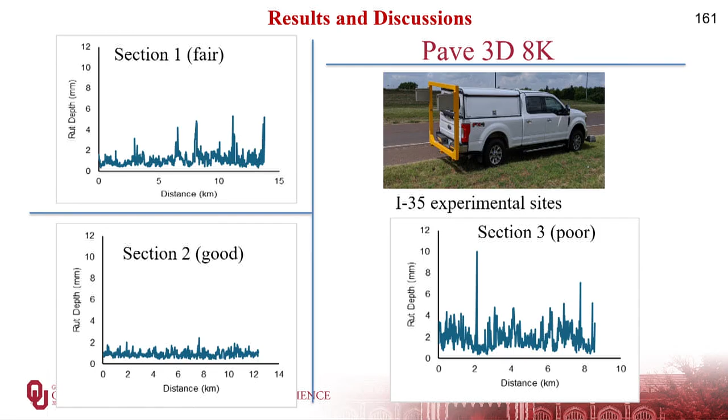For coring, we wanted to see how the cores look, or what the actual pavement condition is. So we took some cores from the I-35 sections.

We found that section 2, which is good, is actually a composite section—with concrete on top and asphalt on the base—and it shows very low deflection and very good condition.

Section 1, which is fair, has a much thicker pavement with asphalt stabilized base. Section 3, which is poor, showed some delamination—we weren't able to take out the full core because the bottom part kind of fell apart. So that's the condition.

Also for the I-40 sections, we found that it is generally a flexible pavement with a thickness of around 10 inches or more.

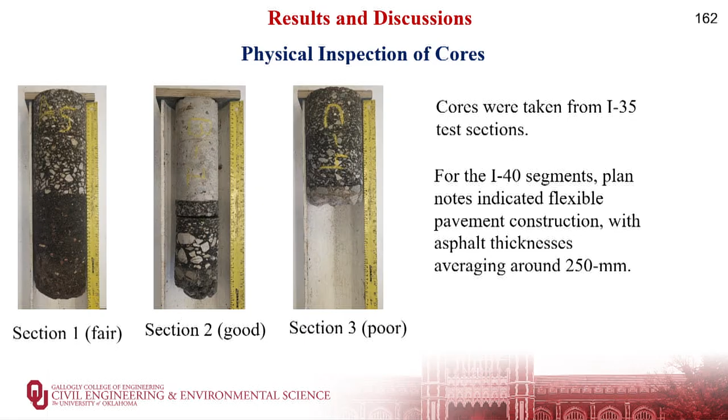As I mentioned, we also did the fast falling weight deflectometer to find out whether that data correlates with the TSD data. TSD shows that section 2, which is good, has very low deflection. The other sections, fair and poor, also show not that bad, but almost similar results.

From GPR, we collected GPR data on all those sections and tried to compare them point to point.

Also, we have found that it tells us the same thing. The good sections did not show much anomaly on the GPR data. The fair section has some points where we may have some problem on the subsurface, and the poor section has shown a little bit higher amount of anomaly on the GPR readings.

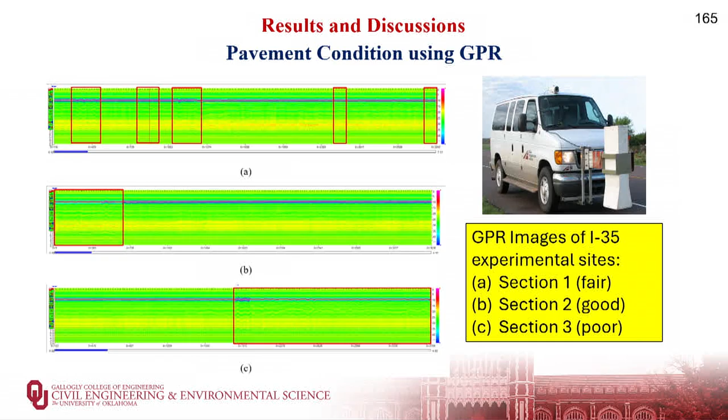But we were not able to correlate directly GPR data with the TSD data because GPR data is formatted differently than the TSD. So formatting wise, it was a nightmare to compare between the two. On the I-40 section, we have seen the same thing too. So based on that...

In this study, we compare FWD as the basis or reference parameter. So FWD W1 has shown very good correlation with SCI 300 and AUPP and D1500, and some other parameters too, some other combinations as well.

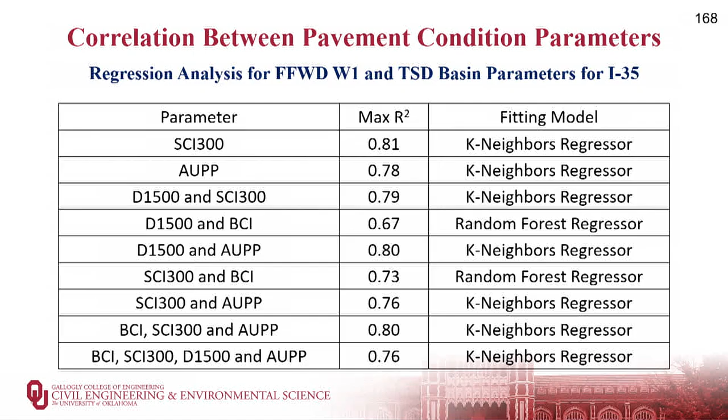So using that information and considering FWD as a reference, we tried to calculate the remaining life of the pavement. And from that remaining life of the pavement that we collected data from, we tried to correlate that remaining life with the TSD SCI 300 parameter, as it has shown very good correlation with other parameters.

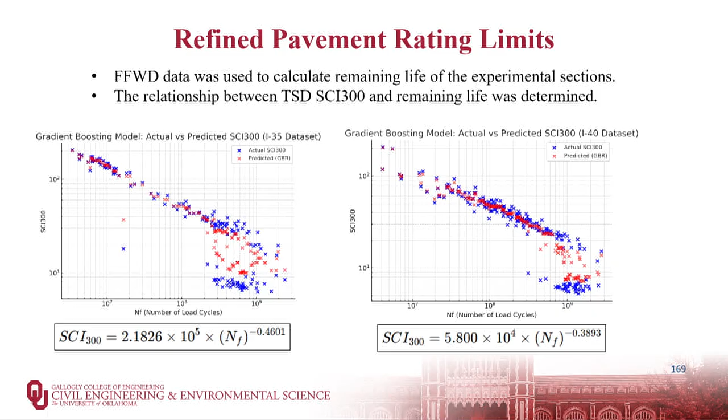From that, we have developed this equation where the SCI 300 is correlated with the remaining life of both the I-35 and I-40 pavement. And using that, we actually came up with a pavement threshold for both I-35 and I-40, and these are the thresholds.

We have considered that, generally, if the pavement has a remaining life of less than 2 years, it is considered poor. A remaining life of 2 to 5 years is generally fair. More than 5 years is generally considered a good pavement.

With that I will stop. So we have seen that TSD could be used as a tool for rapid assessment on the network level. We have found very good correlation between different technologies, so they can be used alternatively. We have defined some thresholds that may also need some refinement when we go for more data collection. With that, thank you very much.